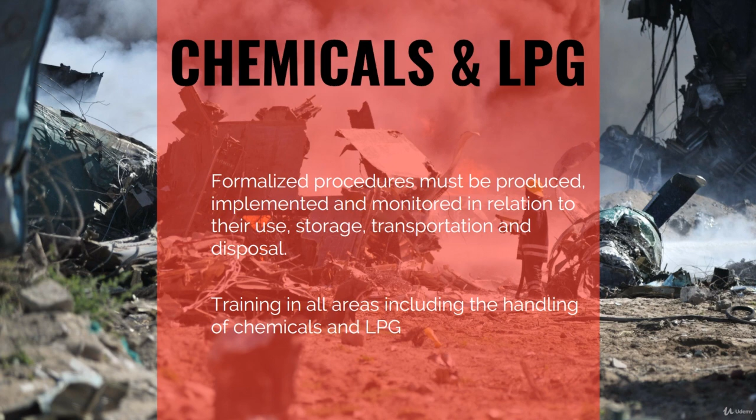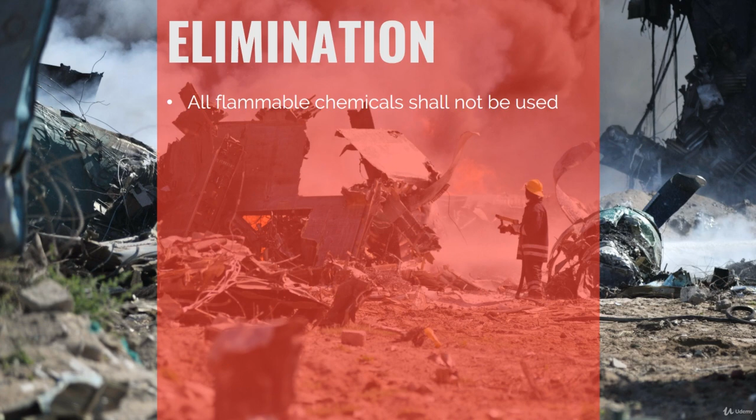The first control measure we have is elimination. So ideally, the use and storage of flammable chemicals and substances and LPG should be avoided where reasonably practicable, and the same can be said for using low flashpoint liquids. But where and when this cannot be achieved, other chemicals, substances or liquids which are either non-flammable or have a higher flash point may provide suitable safer alternatives.

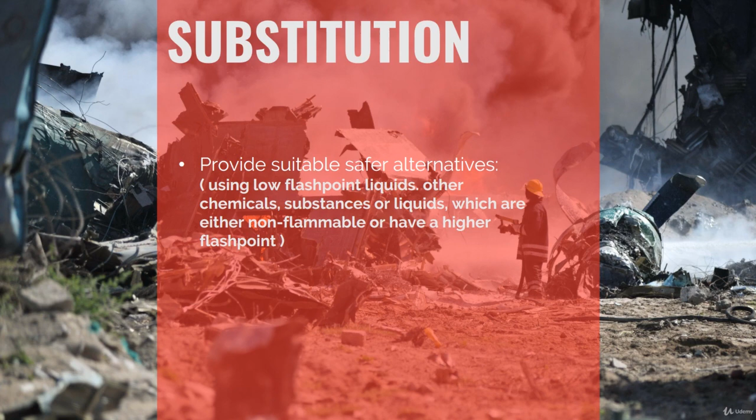Also, it must be noted that reactive chemicals whose properties in themselves are non-flammable but may react violently, even explosively, when mixed together, should also be considered in relation to substituting them for less reactive materials.

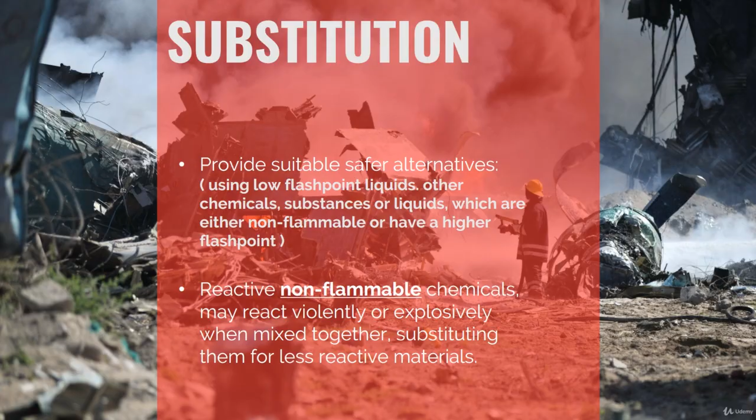The next point you need to be concerned about is storage. Where substitution cannot be accommodated, the provision of safe storage must be considered as a key element in reducing the fire and explosion risks from hazardous materials. So of course arrangements should be made for flammable liquids, gases and substances to be stored well away from other processes and general storage areas.

This is most effectively achieved by physical distance, but an alternative approach may be to provide a physical barrier such as a wall or partition combined with a storage system or container. And in case the storage facility is to be located within a building and the hazardous materials are to be handled within the area around the store, fire-resisting separation from other areas of the building or workplace should be considered.

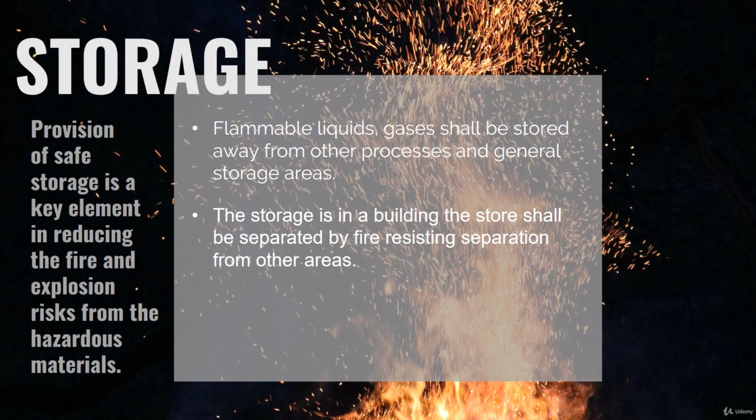Bear in mind the arrangements for storing flammable substances and LPG will depend upon the storage facilities available, the amount of hazardous materials and the nature of the materials. For example, when storing large quantities, maybe 50 liters or more, ideally an external storage area will be provided that will include the following considerations.

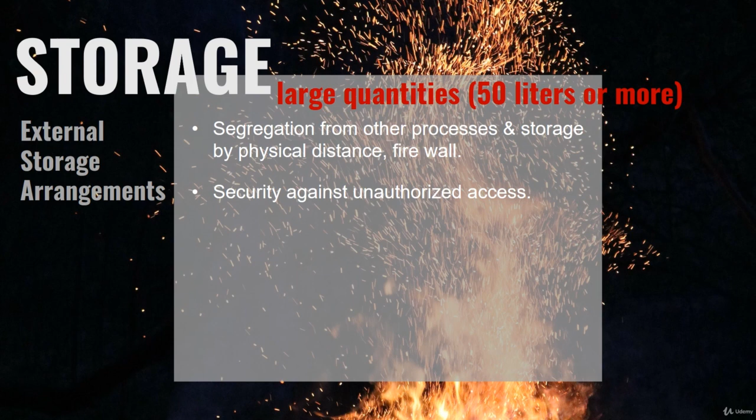Firstly, segregation from other processes and storage by physical distance and a firewall. Then security against unauthorized access, with locking mechanisms and physical walls and fences. And here we also mean security against arson.

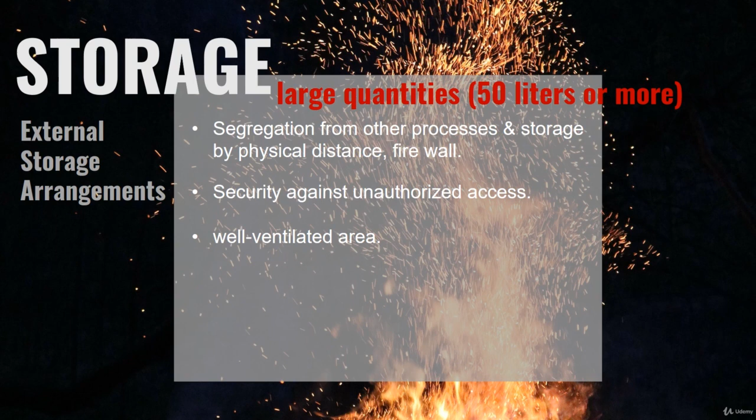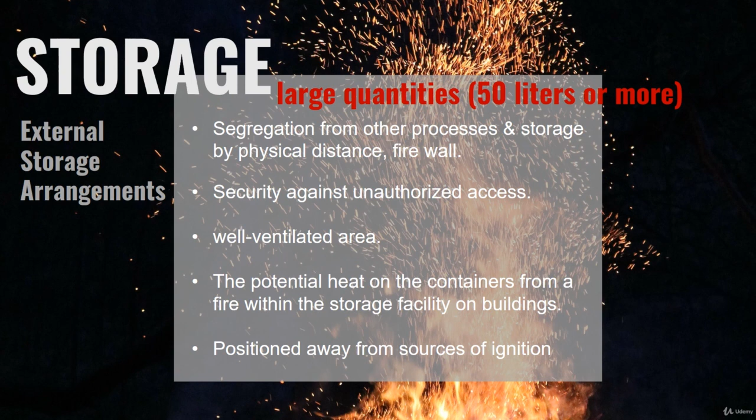The next example is the arrangements for storing large quantities of LPG gas cylinders, and actually they are similar to those required for flammable liquids. In addition to providing adequate levels of signage on site, a formal system of work will need to be developed and implemented.

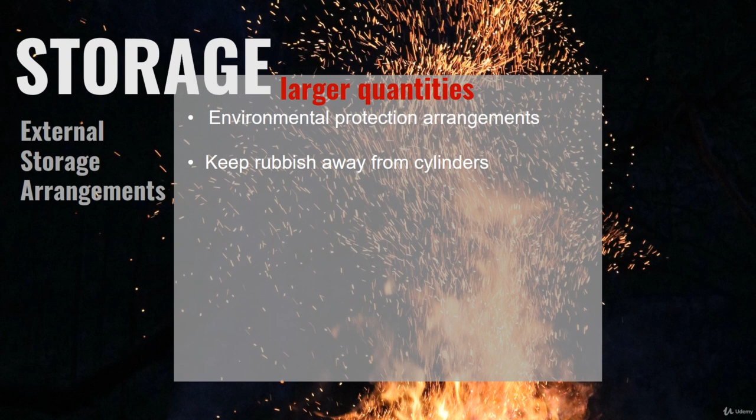Firstly, you have to be keen on environmental protection arrangements, keeping rubbish and anything combustible well away from the cylinders, keeping weeds and grass in the vicinity cut down, and preventing any electrical equipment, vehicles, bonfires or other sources of ignition near the cylinders. You have to prevent smoking when changing cylinders, and also prevent people not involved with the storage or installation gaining access to it, especially children.

And you have to protect against accidental damage, ensuring that the pipework is properly routed and supported, and also enable reports of any equipment failure or damage to the supplier without delay.

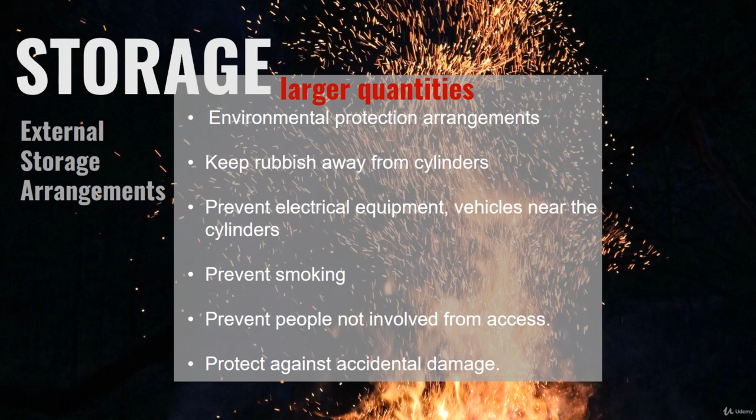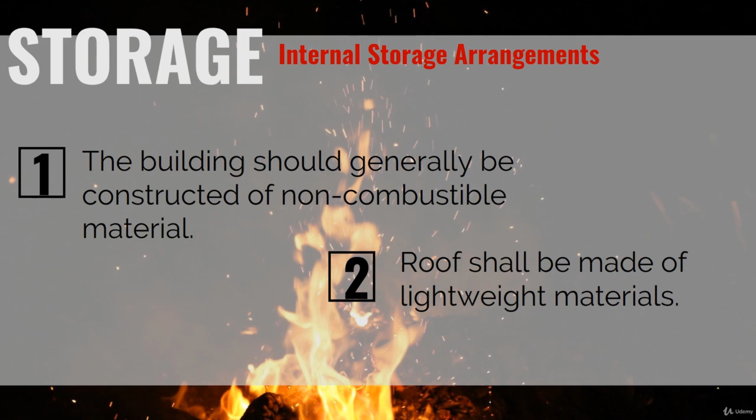The next point is internal storage, where flammable substances can be stored within specially designed separate buildings, with the same control measures as those required for outdoor storage, with the additional requirement that the building should generally be constructed of non-combustible material, and the roof be of lightweight materials, so the roof would open readily to release the effect of an explosion, therefore acting as explosion relief.

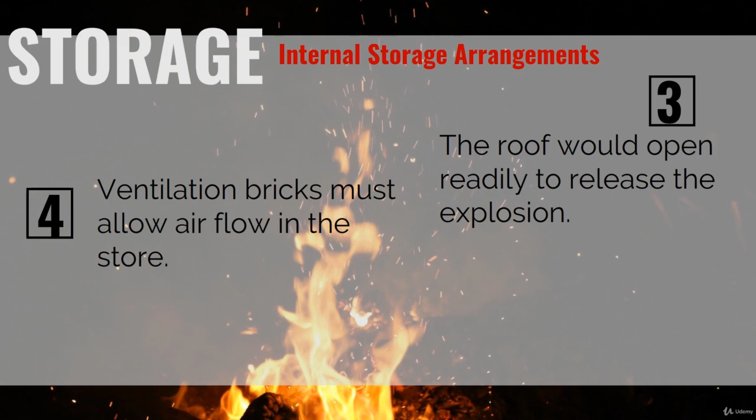The ventilation of any building used as a flammable material store must also be considered, as the ventilation bricks must be positioned to allow airflow within the store. All containers used to store flammable liquids should be designed and constructed to meet the standard of being suitable for the purpose, and containers also need to be a performance tested type.

They should be robust and have well-fitting lids and spill-resistant tops to prevent leakage if knocked over, and to ensure that no chemical or physical interaction occurs which might cause leakage. The material from which the containers are made needs to be compatible with the properties of the liquid. In addition, containers may need protection against corrosion.

You have to know that LPG cylinders can also suffer degradation from corrosive atmospheres, particularly in relation to some chemical operations. Therefore, the use and storage of the cylinders should reflect the workplace conditions, and they should be stored outside.

The last point in this lecture is training, and as discussed at the start of this lecture, training is a key element for ensuring effective management of the organization's fire safety, in particular with regard to flammable substances and LPG. Any training program must cover the arrangements for the safe handling and storage of these hazardous materials. So an outline of such a program may be as follows.

It should explain the types of flammable substances in use and their properties and hazards, and the general procedures for safe handling of substances and operation of plant. Also the use of personal protective equipment and clothing, housekeeping arrangements, and reporting of incidents and faults, including spills and minor leaks. Also specific instructions on individual items of equipment, plant and processes.